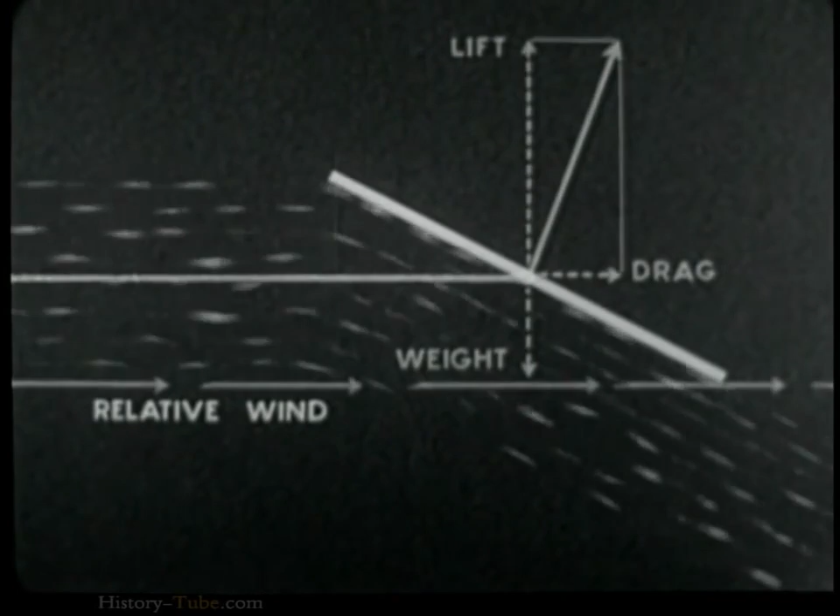The acute angle between the relative wind and the face of the plate is called the angle of attack. This angle may have any value from 0 to 90 degrees and may be either positive or negative.

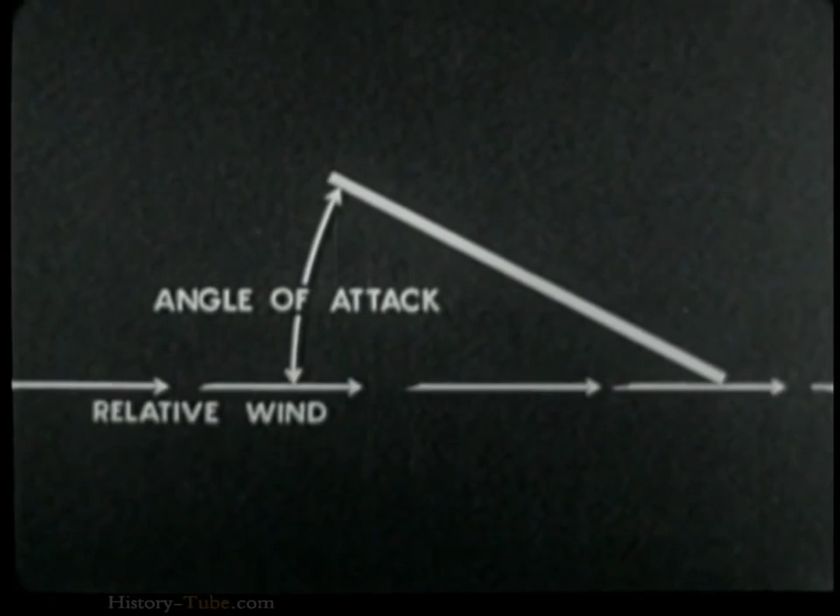An airfoil is any surface designed to be projected through the air in order to produce a useful dynamic reaction. Airfoils which have been studied and used vary widely in form. This is probably the most common type of airfoil section.

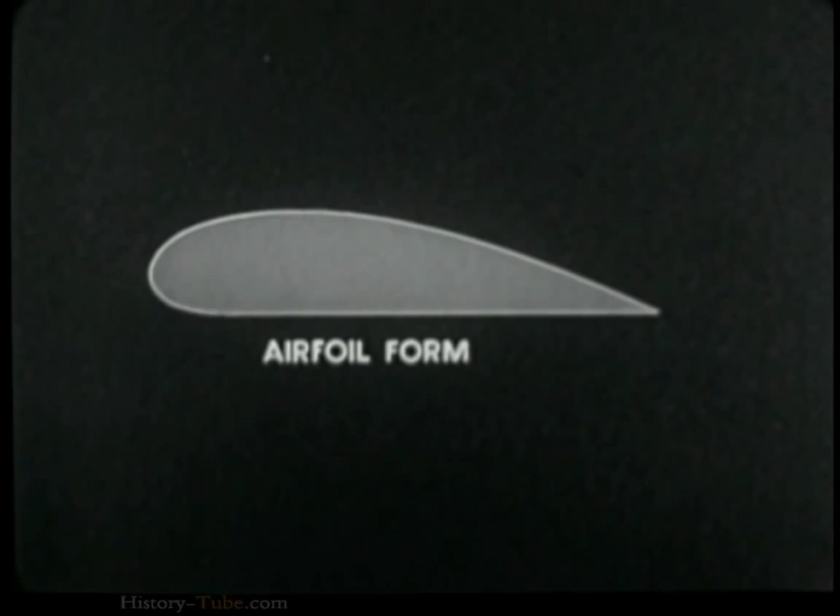Others are convex on their upper surface and concave on the lower, while still others are convex on both surfaces. Relative thickness and curvature of airfoils vary considerably.

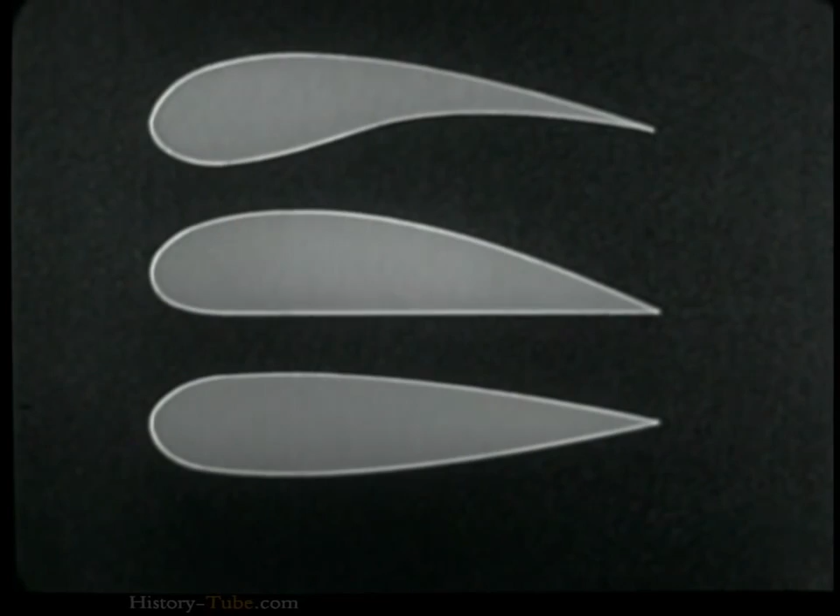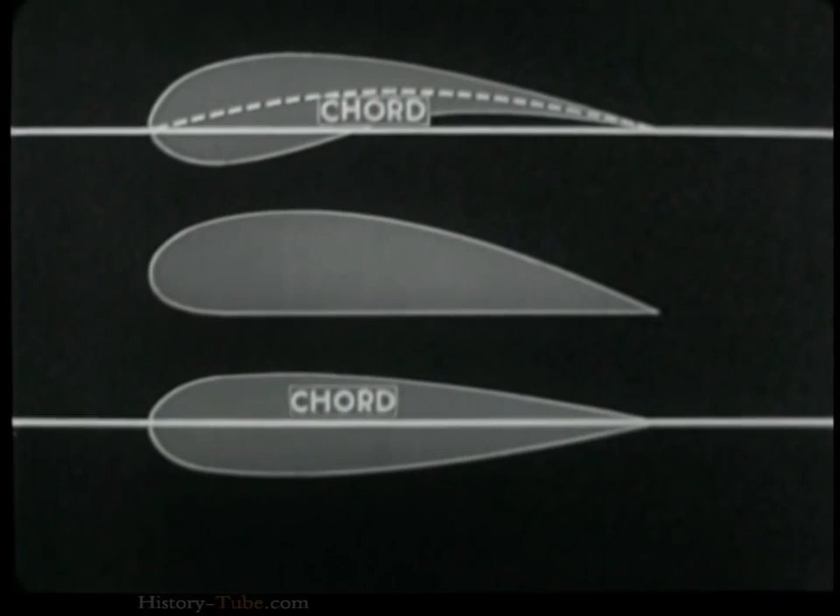In general, a line through an airfoil's leading and trailing edges is known as its chord. This is the case with an airfoil having a symmetrical double convex camber. In an airfoil which is convex on its upper surface and concave below, the chord corresponds to the arc of the mean camber. In other airfoils, it is the line of a straight edge brought into contact with the lower surface at 2 points.

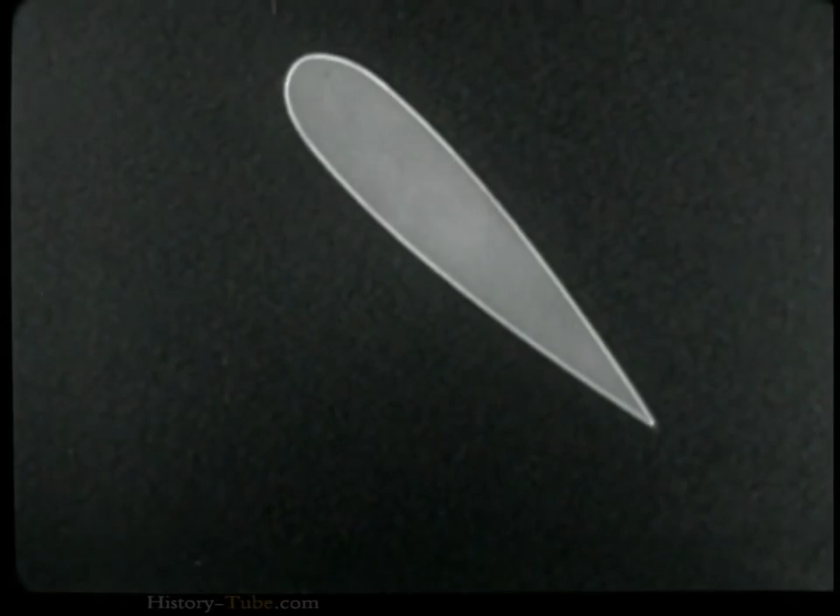The acute angle between the chord of an airfoil and the relative wind is known as the angle of attack of the airfoil.

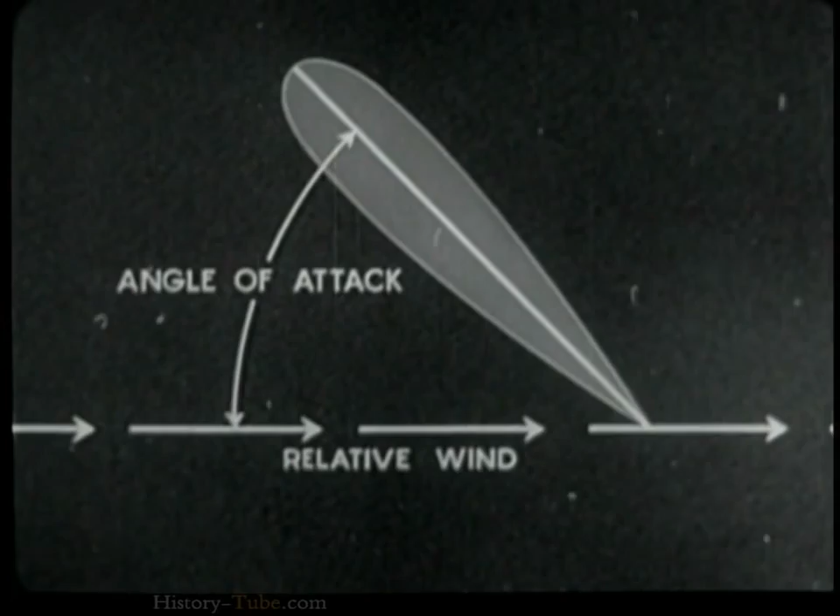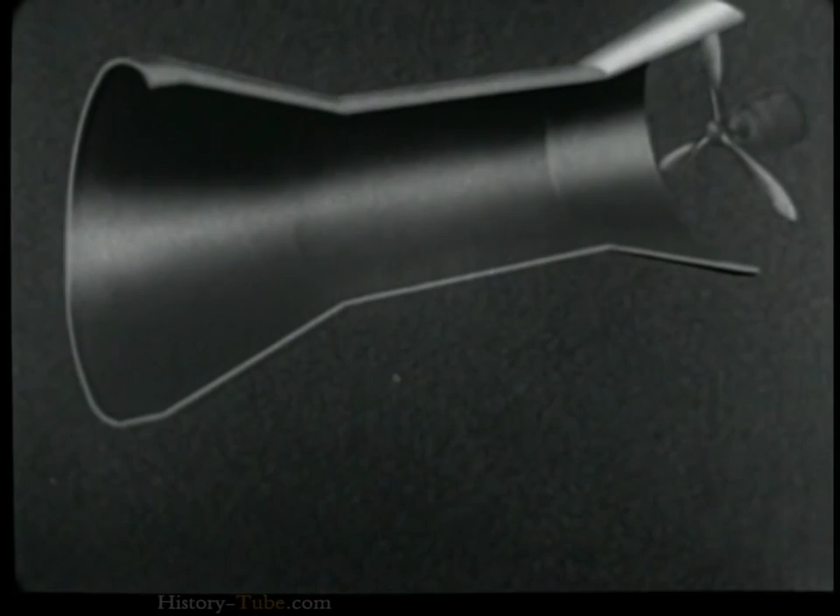A wind tunnel is a device for testing reactions on airfoils and other aerodynamic shapes. It usually consists of a large tube with a constricted throat. A propeller produces airflow, and a honeycomb arrangement is placed at one end to ensure straight airflow.

When lift and drag of an airfoil are to be measured, the model is placed in the chamber and supported by wires. One wire runs from the model through the top of the tunnel to a balance arm which is weighted so as to maintain tension and compensate for other forces.

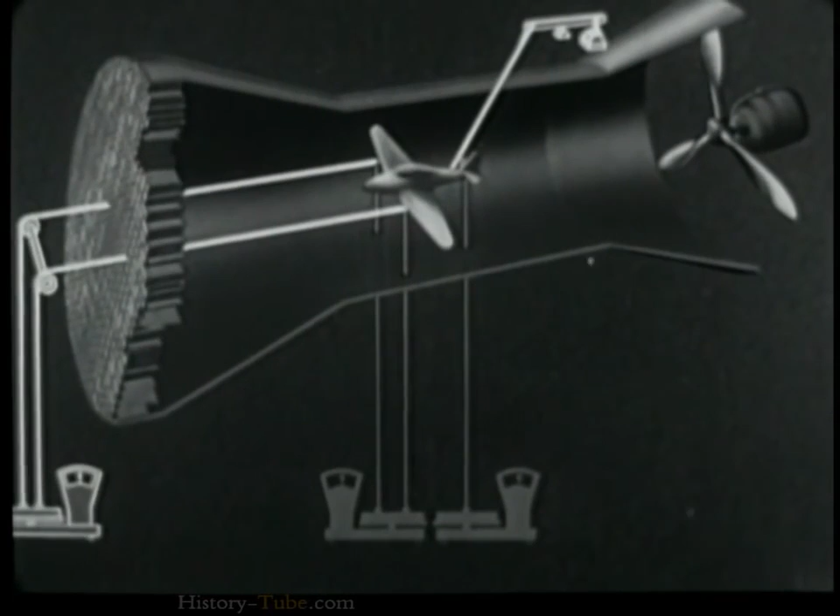From the leading edge of each wing, a wire runs forward in the direction of flight over pulleys, and down to a bar on a platform type of scale. A second pair of wires runs vertically downward from the wings to another scale. Finally, a wire extends from the tail down to a third scale. In this way, the model is suspended so that the various forces exerted upon it may be measured.

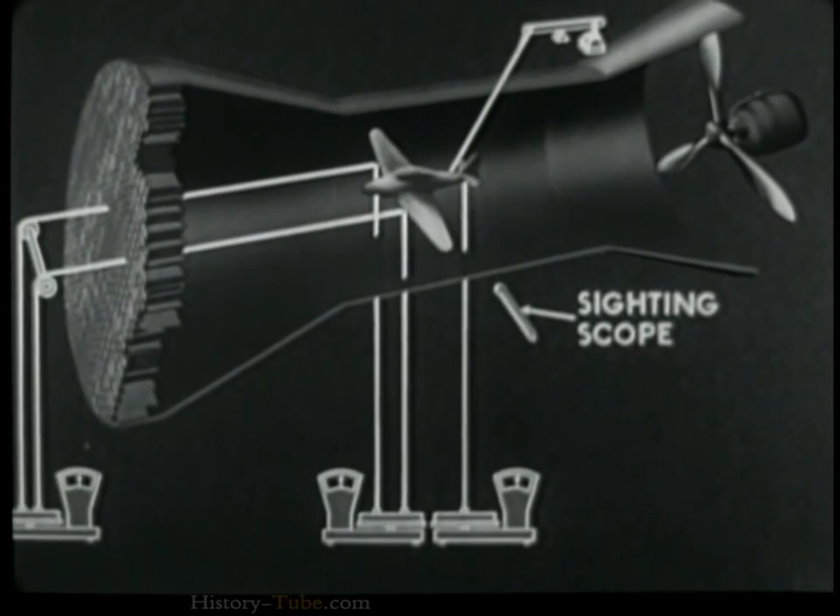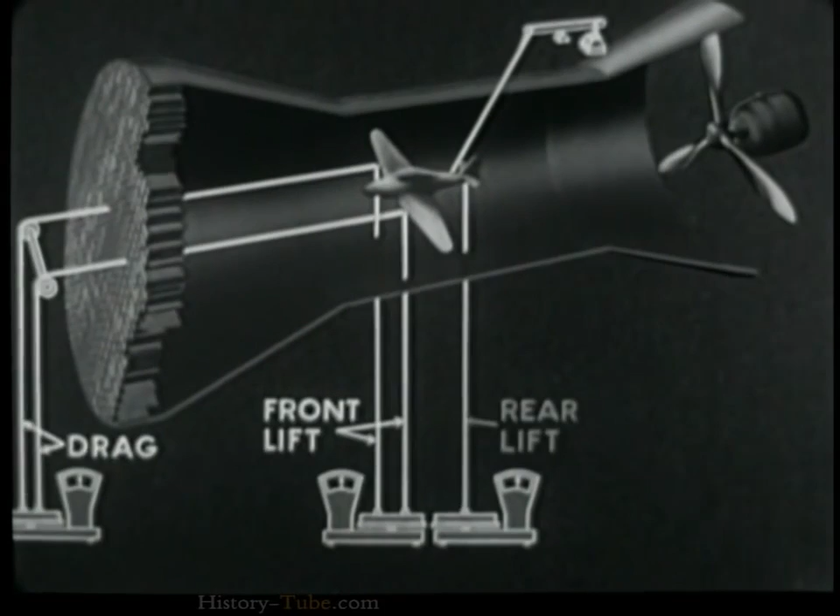The position of the model is observed through sighting scopes. With the air flowing at the desired velocity, drag force is exerted upon these wires. Front lift is measured as the actual lifting force upon these wires. Rear lift as the force upon this wire. Total lift is the sum of front and rear lift.

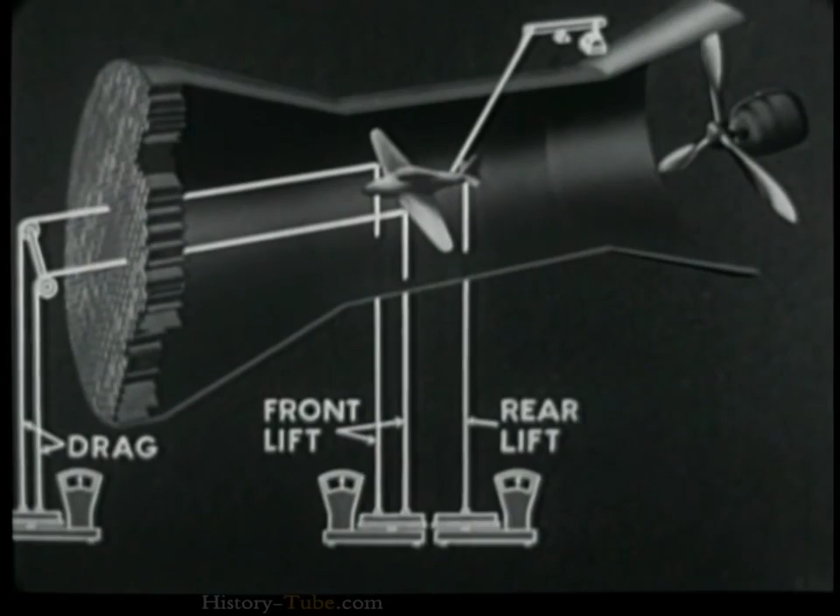Here is one of the Army's wind tunnels at Wright Field. It is nearly 100 feet in overall length, and the test section is 5 feet in diameter. On the intake end, a huge honeycomb arrangement of metal vanes straightens the airflow.

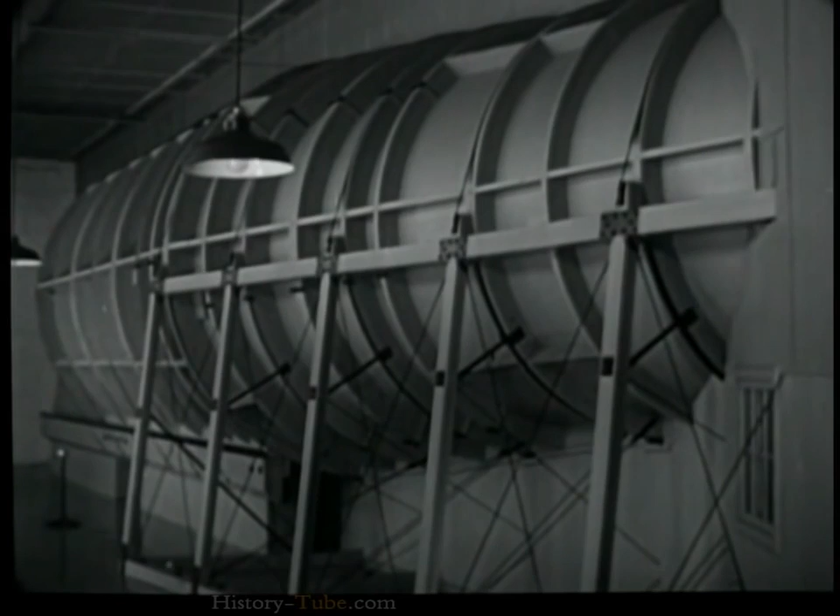Four electric motors of 400 horsepower each furnish power to turn the fan. Two of the motors are shown here. There are two others inside the tunnel.

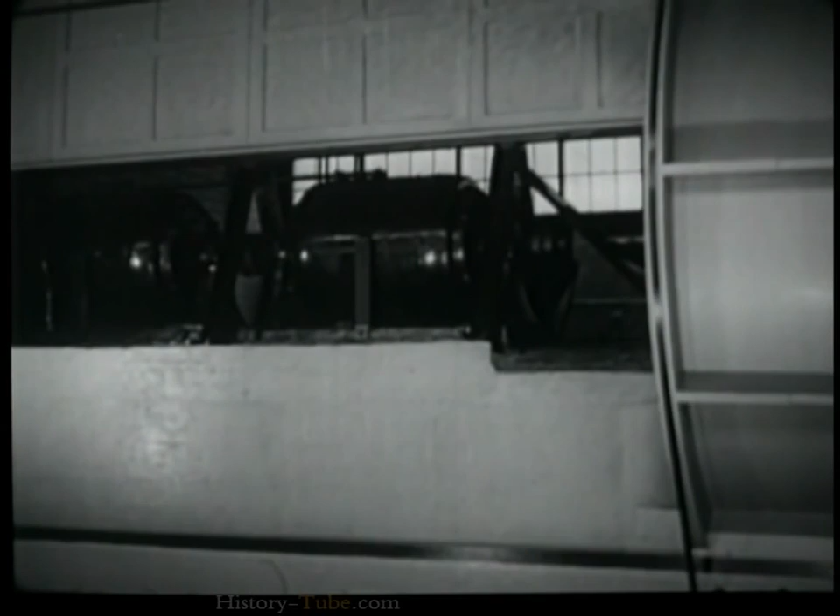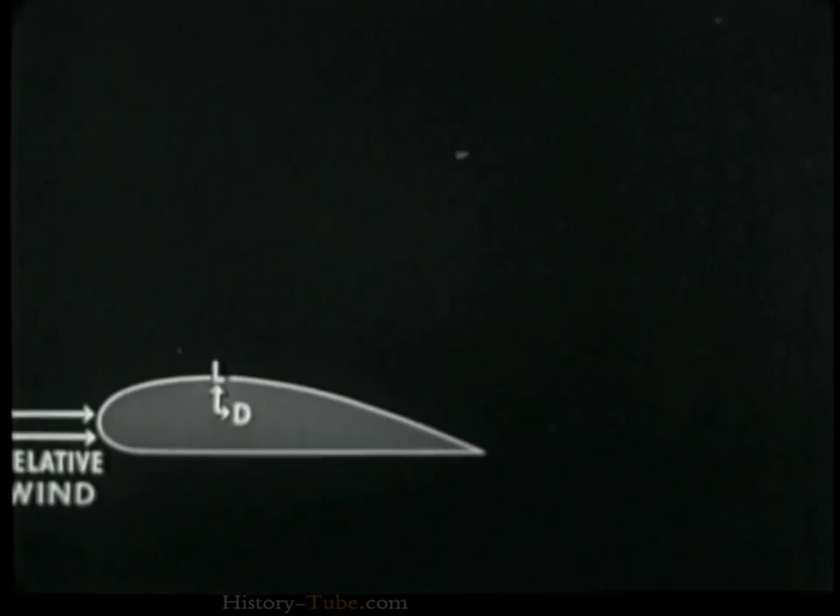The fans are 12 feet in diameter and have 12 blades. When driven at a speed of 700 RPM, they produce an airspeed of approximately 200 miles an hour in the tunnel. Wind tunnel tests show how lift and drag vary with the angle of attack of an airfoil.

In general, as the angle of attack increases, lift and drag increase up to a point where lift decreases abruptly and drag becomes the principal component. This is known as the stalling angle. From this angle to 90 degrees, drag continues to increase while lift falls off.

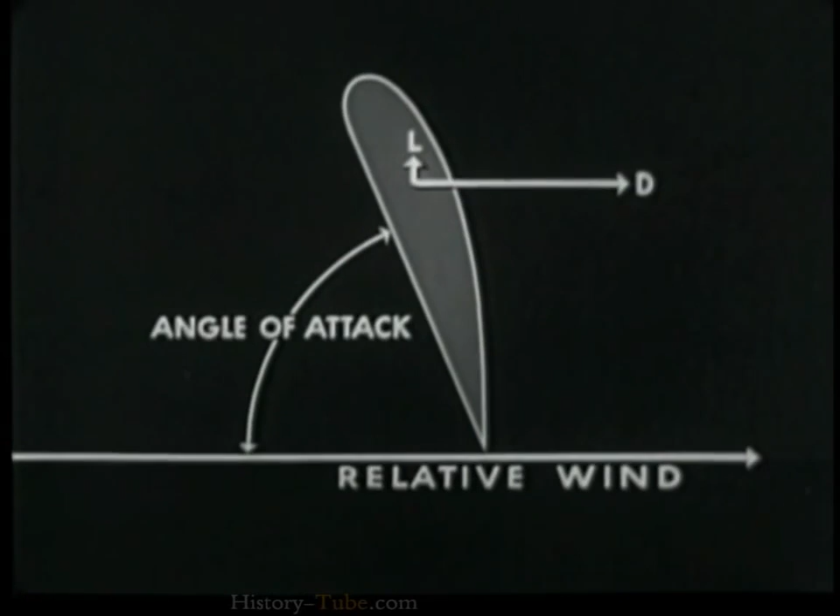At 90 degrees, the airfoil acts like a flat plate. It has maximum drag and negligible lift.

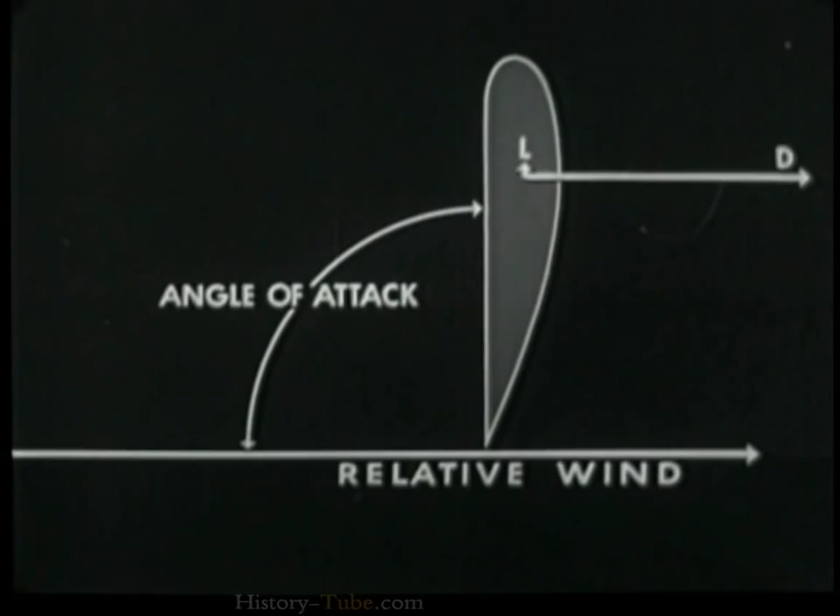Wind tunnel tests have also proven that for any given airfoil, lift and drag vary directly with the area of the wing. If the area is doubled, lift and drag are also doubled.

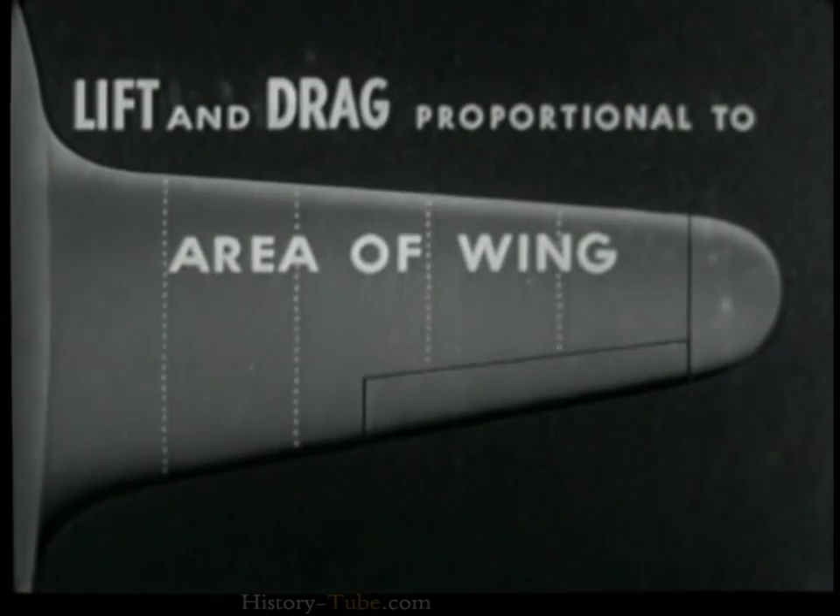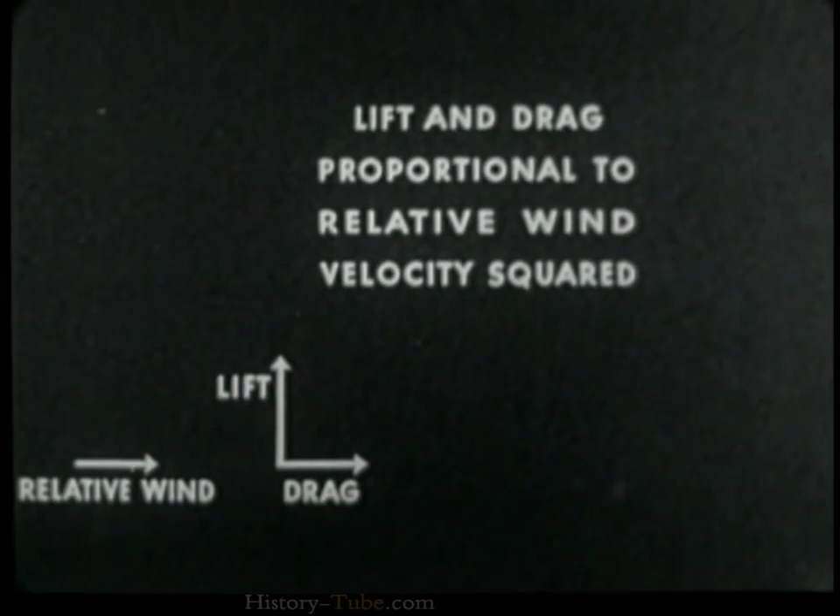Lift and drag vary directly as the square of the velocity of the relative wind. If wind velocity is doubled, lift and drag are multiplied by 4.

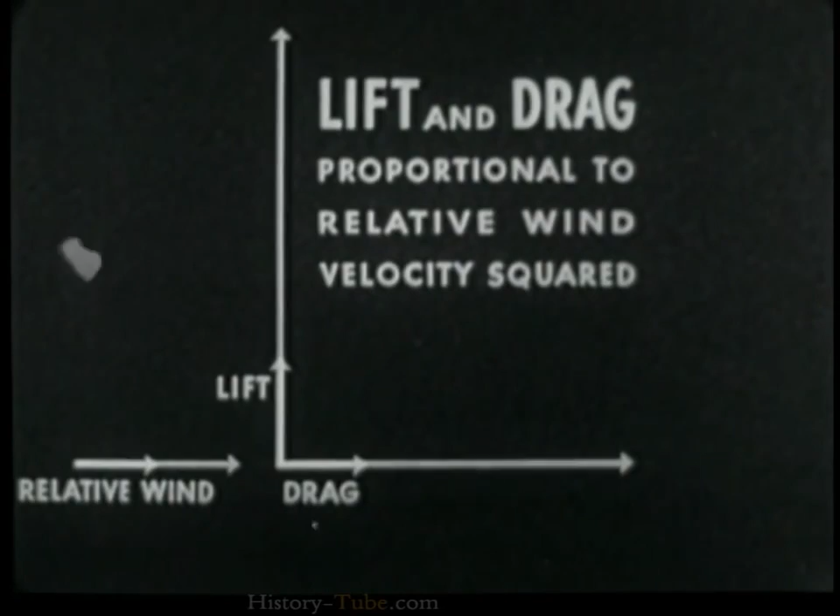Lift and drag are directly proportional to the density of the air passing over the airfoil. If air density is doubled, lift and drag are also doubled in value.

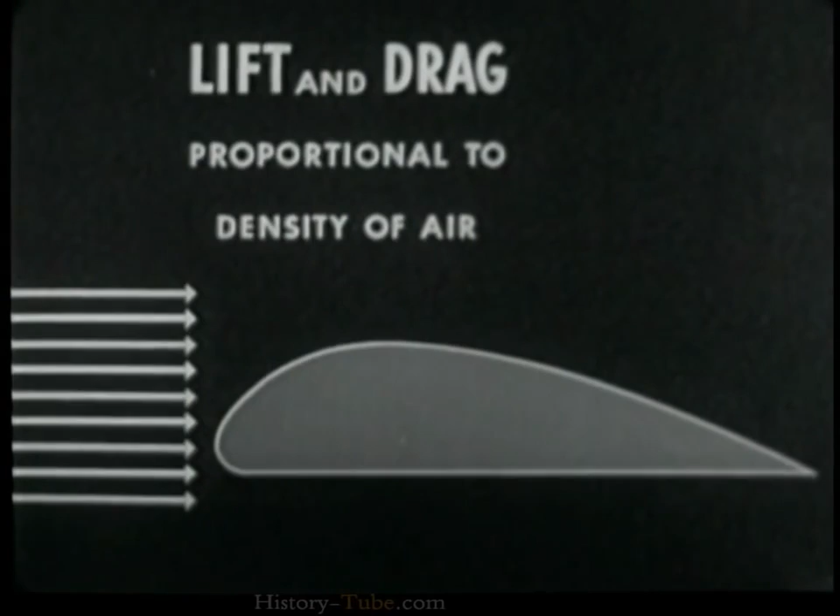Expressed as an equation, the lift is equal to a coefficient which is determined by the angle of attack and shape of the airfoil, multiplied by the density of the air, multiplied by the area of the wing, multiplied by the velocity of the wind squared.

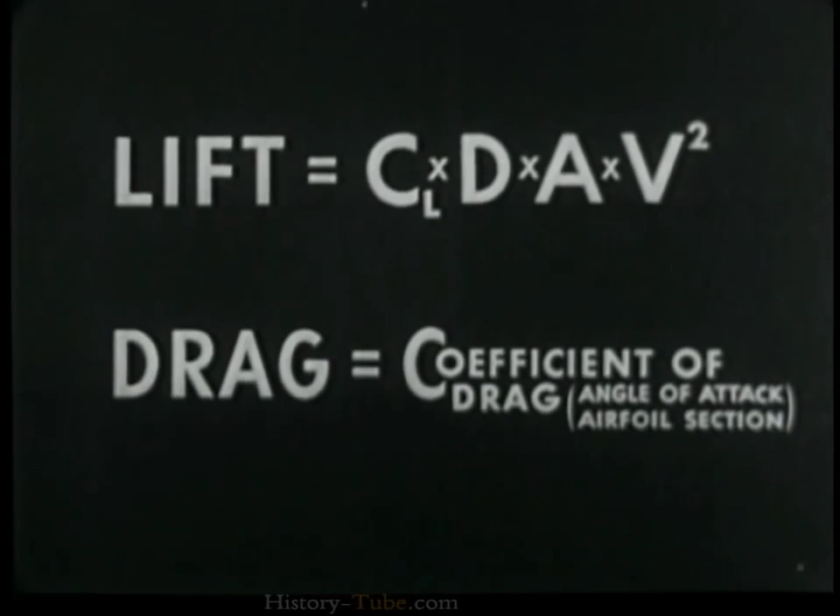Drag equals the coefficient which is determined by the angle of attack and shape of the airfoil, multiplied by the density of the air, multiplied by the area of the wing, multiplied by the velocity of the wind squared.

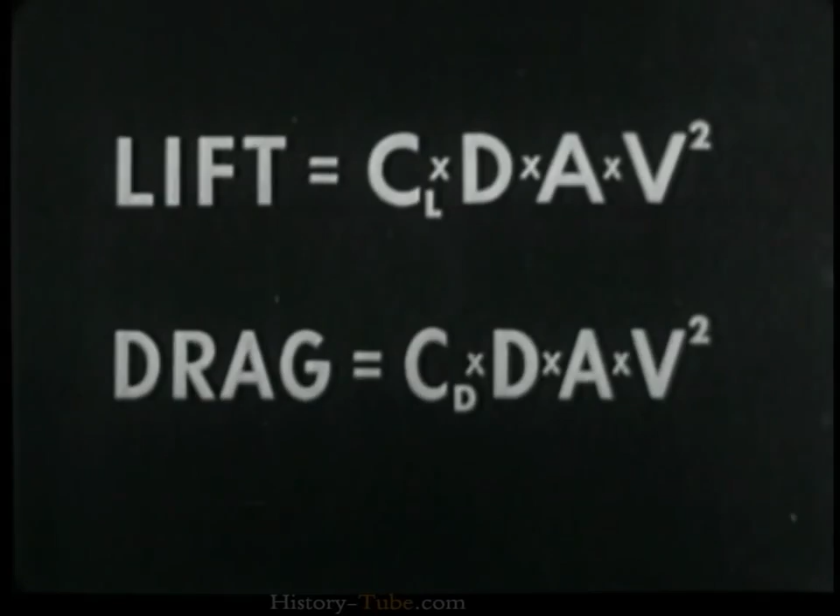When an airplane is flying horizontally at a constant velocity, the forces acting upon it are in equilibrium. The retarding force, or drag, equals the propelling force, or thrust. The lift must equal the total weight of the airplane.

Therefore, the lift and drag equations serve to determine how much weight an airfoil will lift under certain conditions and how much thrust horsepower is required to overcome the total drag of the airplane.

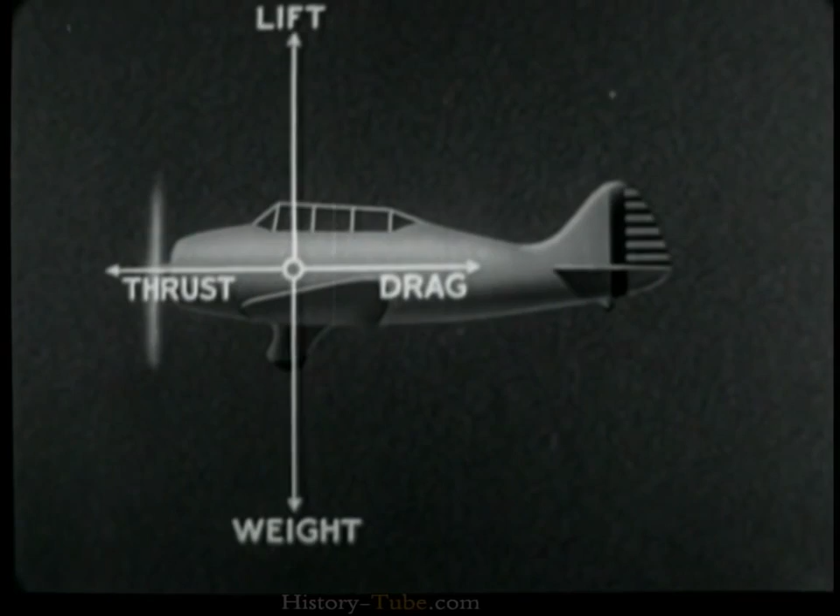The air pressure at various points on an airfoil is measured in order to determine the airfoil's efficiency, or its suitability for a given purpose.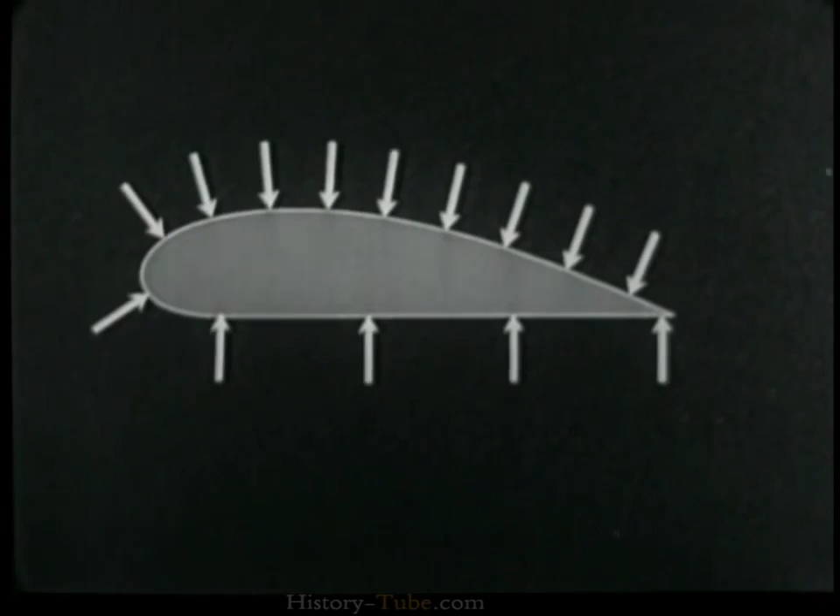The measurements are made by building into a model airfoil small copper tubes which are sealed flush with the surface of the model.

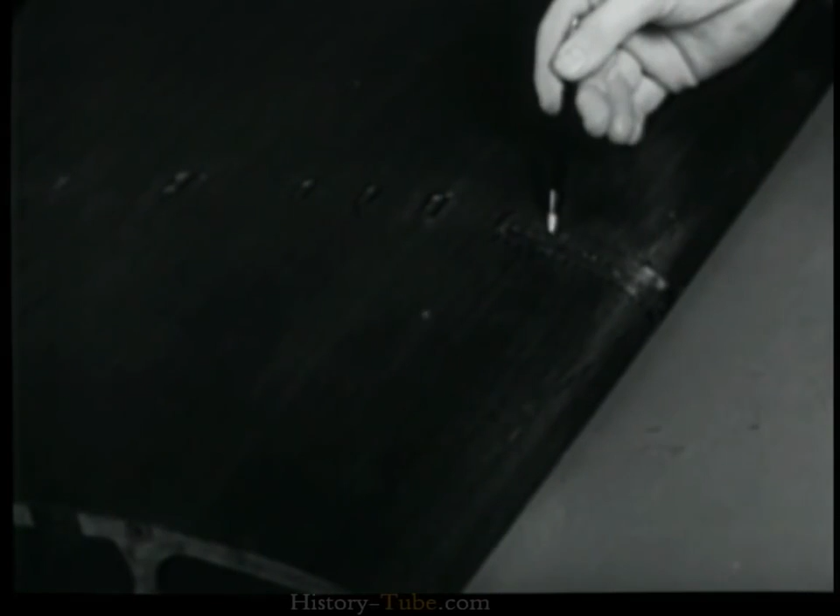These tubes extend from the model to a pressure measuring device outside the tunnel. The device is called a manometer. This figure illustrates its principle of operation.

The liquid in both the tube and the reservoir will be at the same level as long as the pressure in both tube and reservoir are equal.

If by any means, such as this plunger for example, the pressure in the tube is increased, the liquid is forced into the reservoir, lowering the level in the tube.

If pressure in the tube is decreased, the liquid rises above the level of the reservoir.

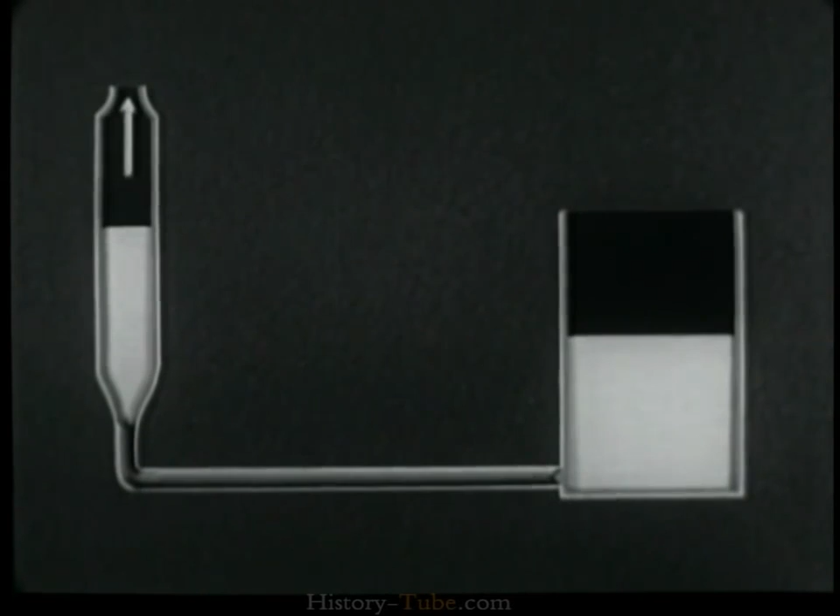In a device such as this, if the liquid in the tube is subjected to varying pressures, the level will rise above or fall below the level of the liquid in the reservoir as the pressure is decreased or increased. Reading of liquid levels provides an accurate means of determining pressure differences.

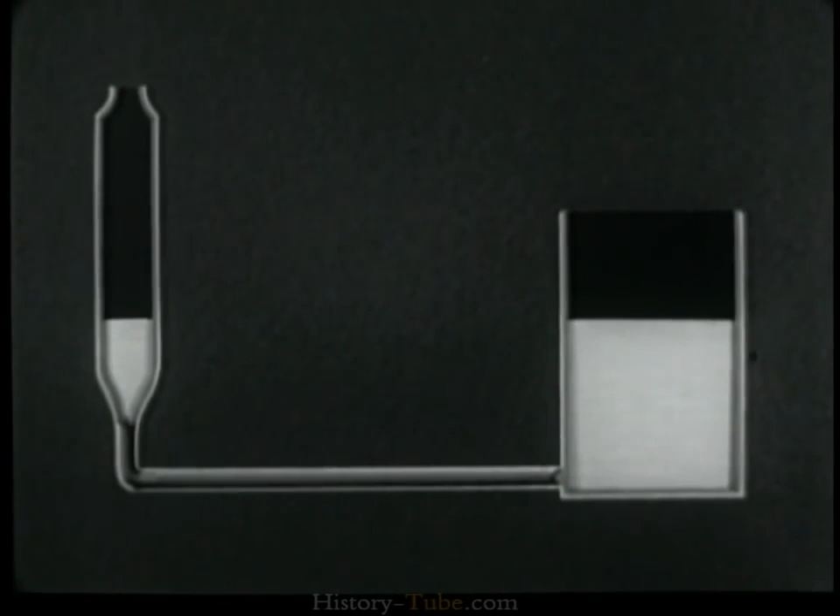Additional tubes may be added, each connected to a different value of pressure, and each will indicate that pressure accurately, regardless of pressures in the other tube.

Operating on these principles, this bank of manometer tubes is used to determine pressures on an airfoil. Because all tubes are at the same pressure, being exposed to the atmosphere, the levels in the tubes are equal.

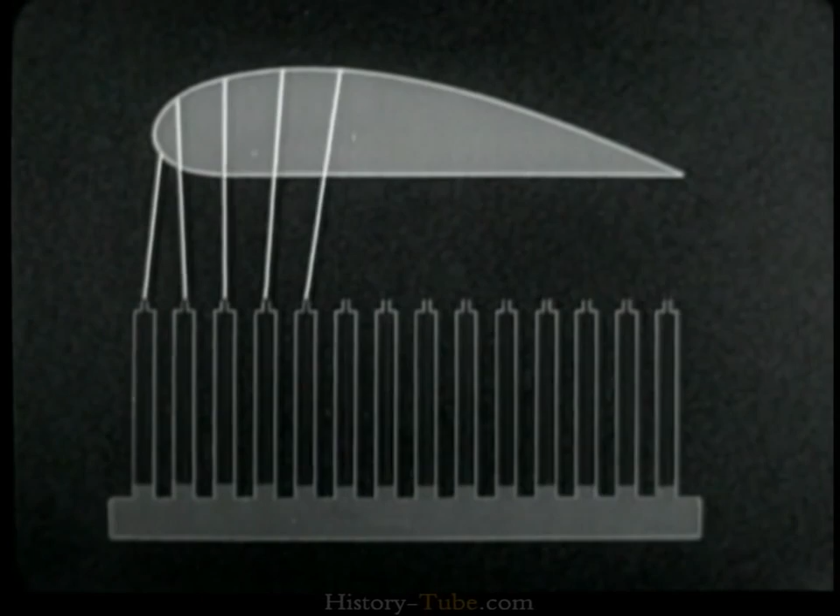For test purposes, each manometer tube is connected to a different point on the surface of the airfoil. The majority of these test points are located on the leading edge and upper surface. Relatively few are placed on the lower surface.

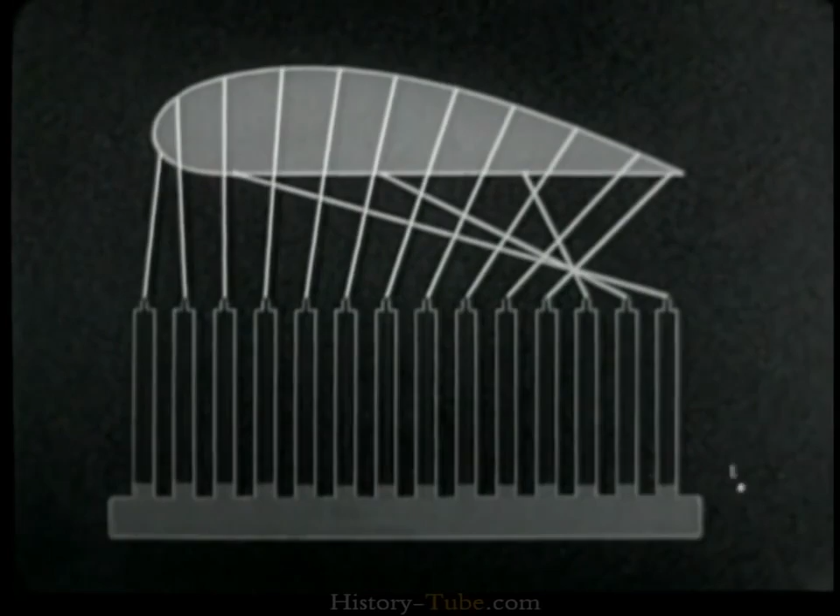Of course, this is only a schematic representation of the connection. In actual practice, tubes run from the manometers through an opening and inside of the airfoil to the test points.

Atmospheric pressure is usually taken as the reference level. Pressures above atmospheric are called positive. Those below atmospheric are called negative.

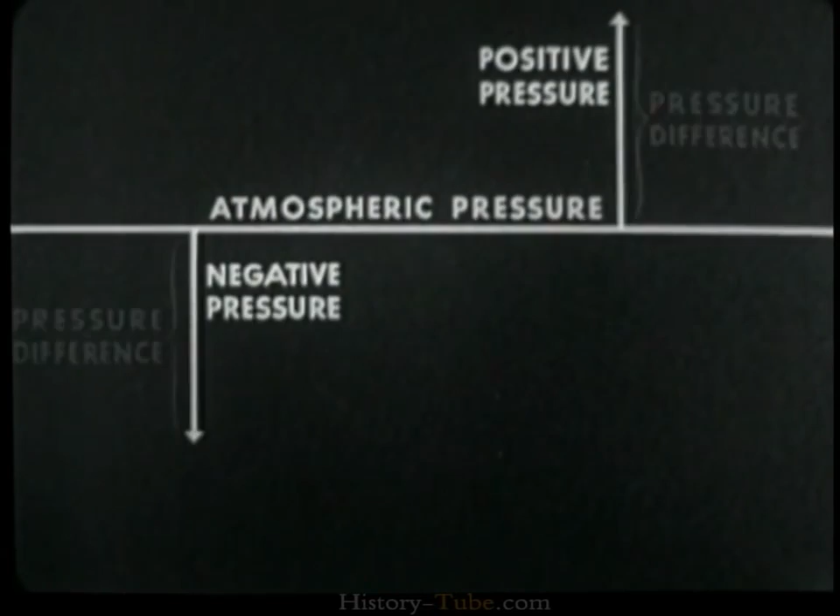Actually, these values are pressure differences with reference to the atmospheric pressure. With reference to absolute zero, all pressures are necessarily positive.

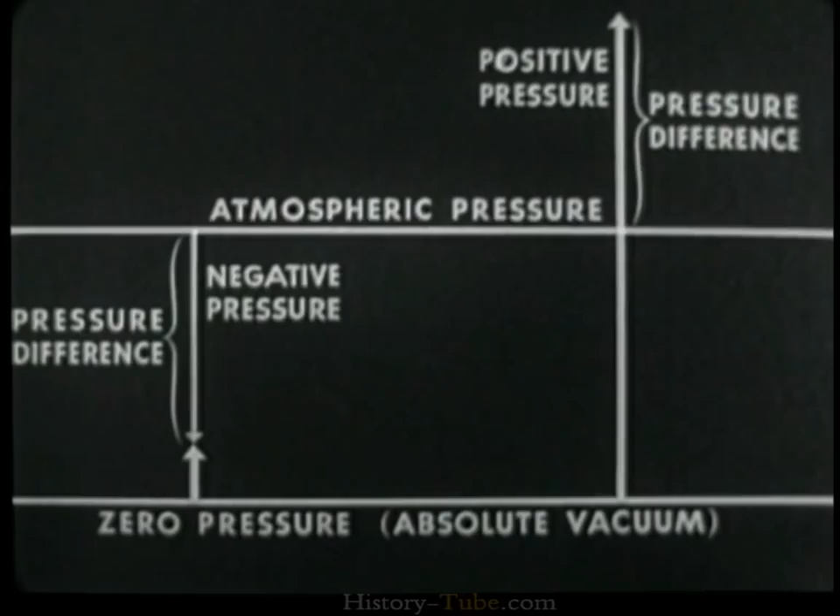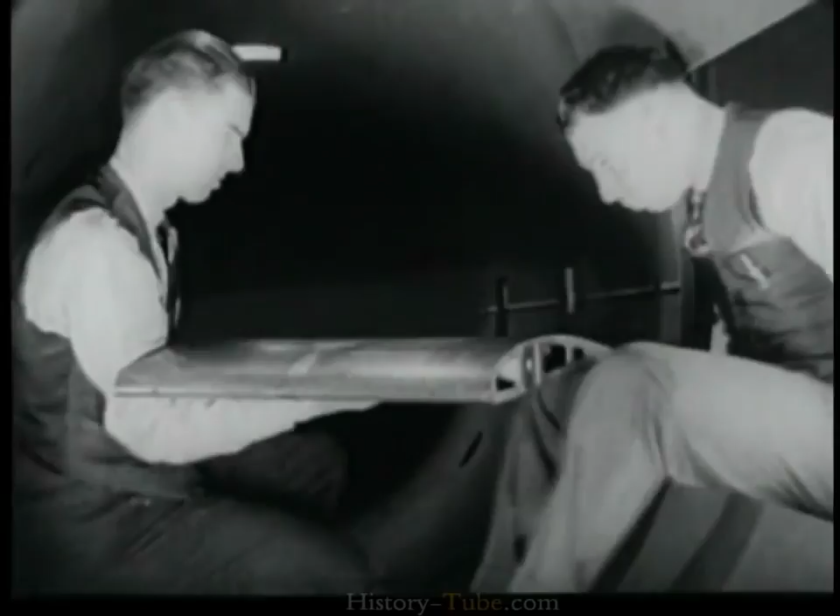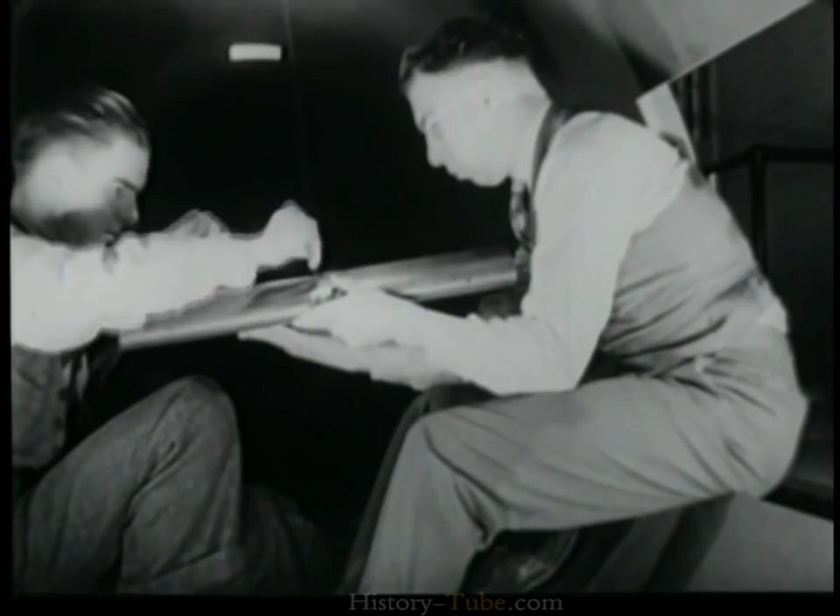The model airfoil is placed in the test section of the wind tunnel. It is supported by wires which will transmit its lift and drag forces to the scales.

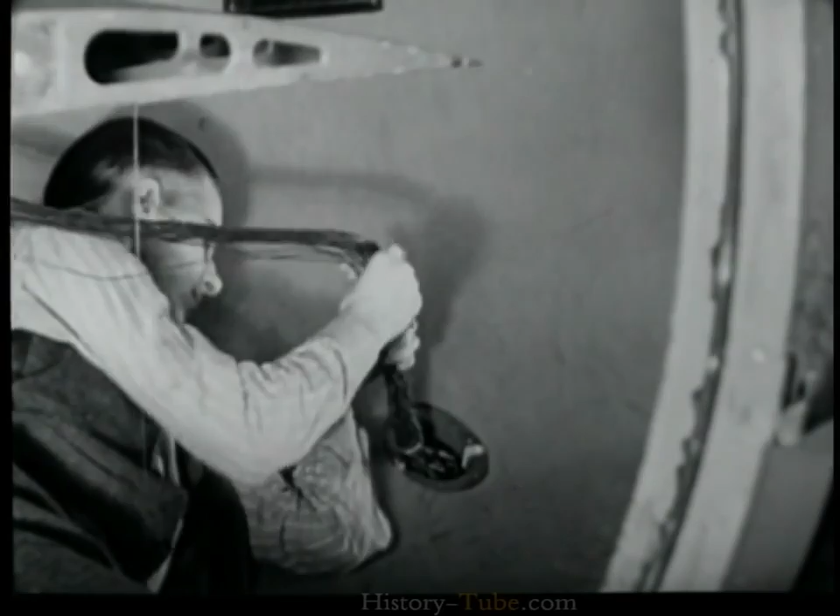Tubes which connect to the test points are passed through an opening in the tunnel wall and connected to the manometer bank. The manometers, being at equal pressures, are at the same level and are connected to the airfoil. Thus, from each manometer tube, there is a direct connection to a definite point on the surface of the model airfoil.

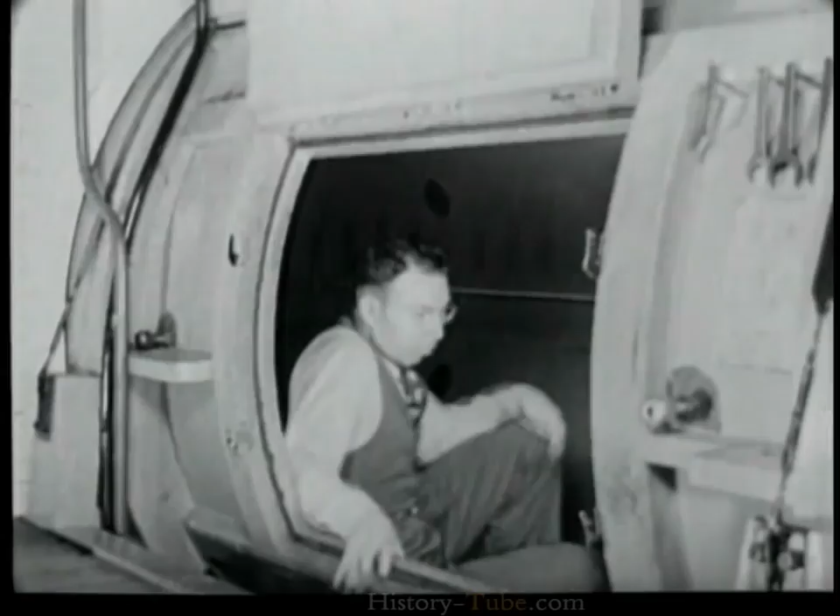All is now ready for the test, and the engineers leave the tunnel to take up positions where they can observe and measure reactions upon the airfoil. The motors which drive the fans are started.

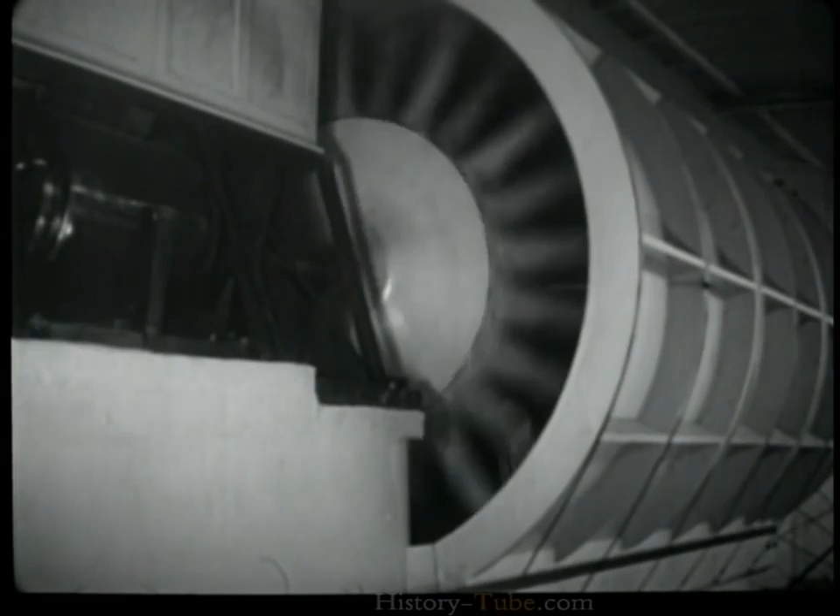In the tunnel, the model airfoil is subjected to the same conditions which it would encounter in actual flight through a medium of the same density, and pressures along the surfaces are at such values as would be met under flying conditions. The manometer tubes tell the story.

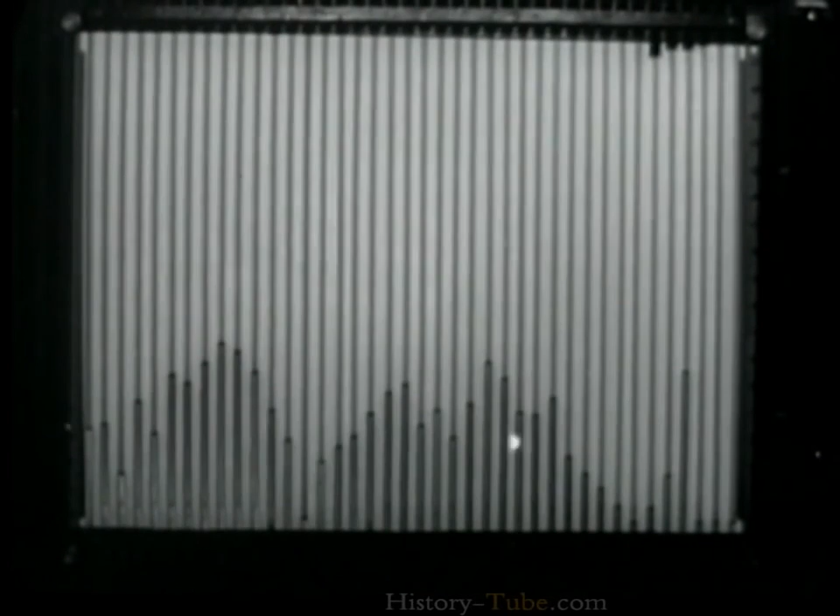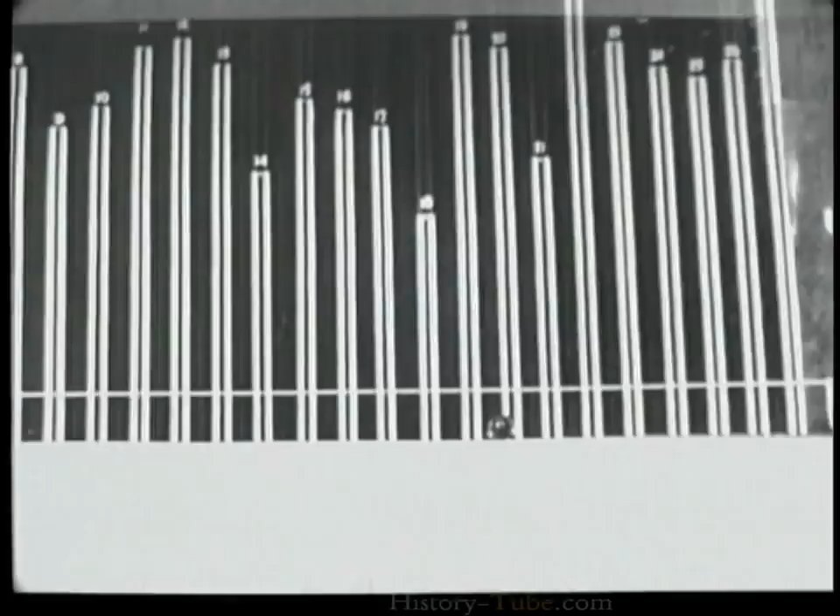Levels fluctuate slightly as minute variations in airspeed or density occur, but the ratios are constant, and the position of the liquid in the tubes shows both positive and negative values for the airfoil. The tubes are photographed to assure simultaneous readings of all tubes, and the photograph is used by engineers to plot the pressure curve.

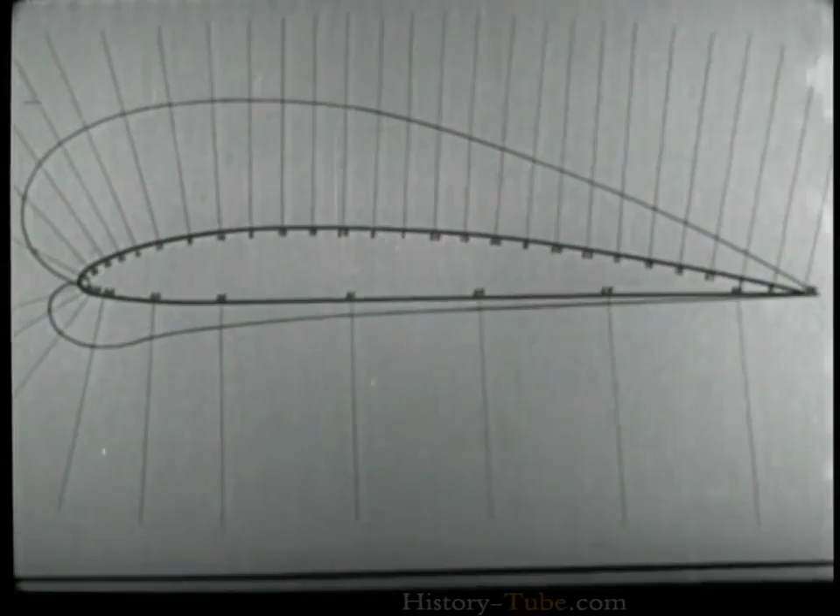In this manner, a diagram is constructed showing the nature and distribution of pressures over both surfaces of the wing section at varying angles of attack. Positive pressures are shown in black, negative in gray.

At 0 degrees, there is a small bulb of positive pressure directly upon the leading edge of the wing. Another area of positive pressure encloses the trailing edge and extends forward about 1/4 chord length along the lower surface. Elsewhere, the pressures are negative.

As the angle of attack is increased, the positive pressure bulb moves lower down on the leading edge and back along the lower surface of the wing, enclosing the trailing edge. The negative pressure distribution remains fundamentally unchanged, although its values are greatly increased. This diagram indicates that the wing has begun to exert a considerable lift.

Increasing the angle of attack still further alters pressure distribution very little, although there is a marked change in values, particularly along the upper surface, where negative pressures are now exerting a powerful lift force.

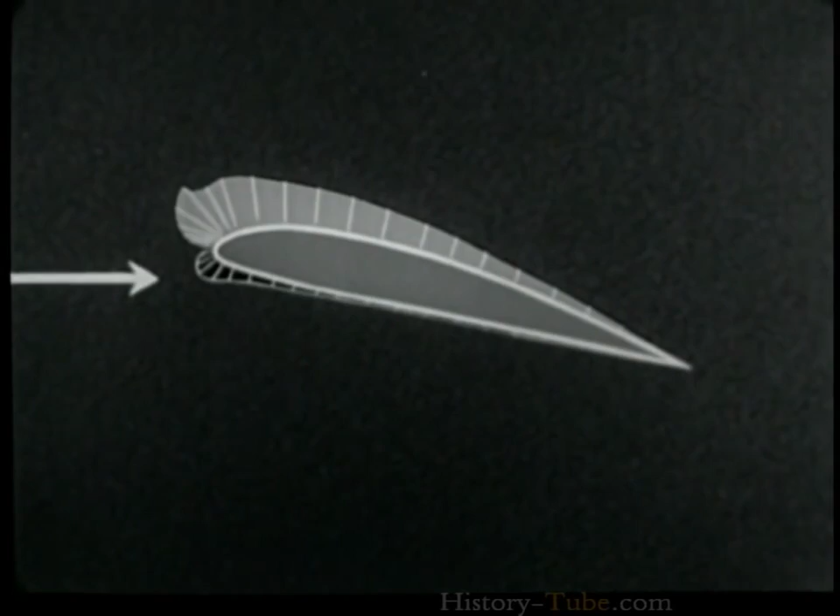By further increasing the angle of attack, positive pressures remain practically unchanged in both value and distribution, but the value of negative pressure continues to increase.

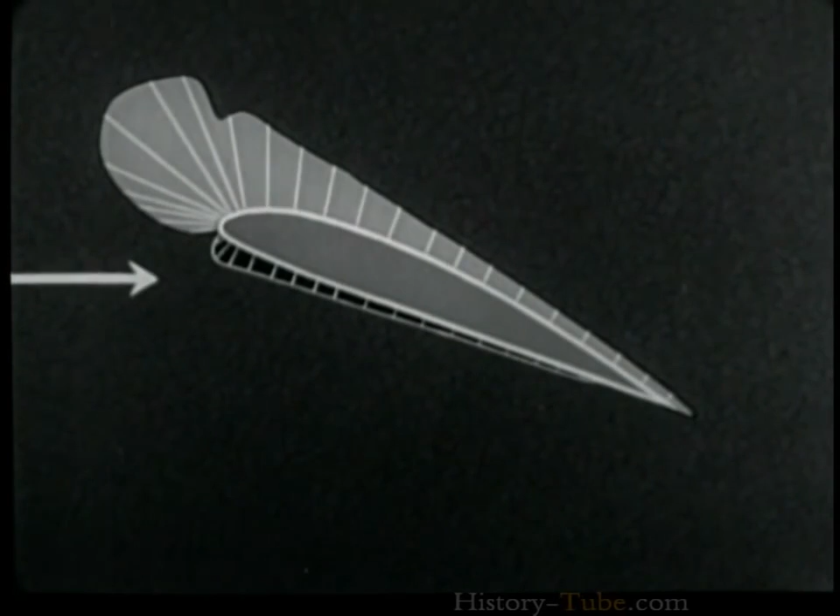At this angle of attack, the wing is well past its stalling angle, yet the positive pressures show little indication of change. With the negative pressures, the greatest change is noticed at the leading edge of the wing, where the area continues to expand, and the outline of the pressure area is extremely irregular.

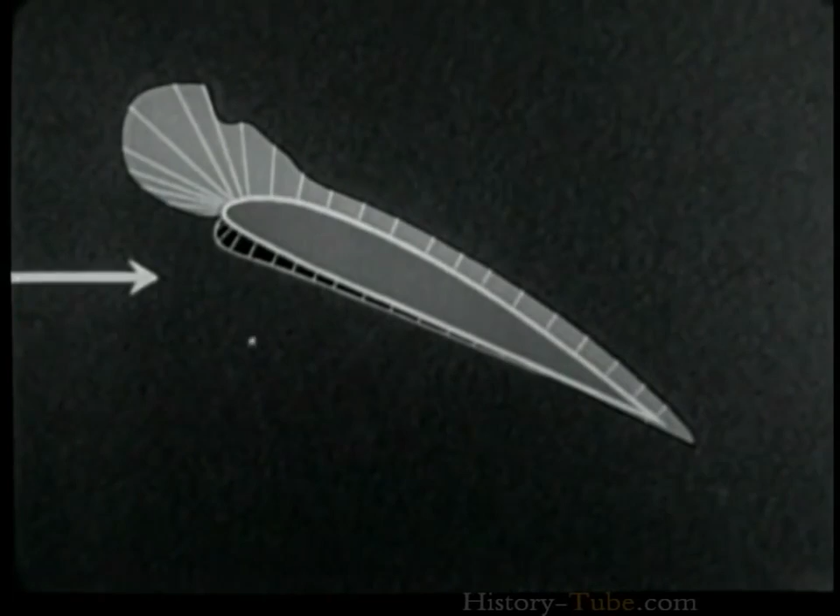Increased angle of attack brings no important change in positive pressure value or distribution, but the negative pressure area is tending to equalize in value over the entire upper surface of the wing.

At this angle of attack, the forward protuberance disappears completely, and an area of nearly equal negative pressure blankets the entire upper surface of the wing. Positive pressure areas still show no important change.

Another increase in the angle of attack merely results in increased values, distribution remaining almost the same as before.

At this final angle, pressures have reached still greater values without any appreciable change in distribution. It might appear from this diagram that at this angle of attack, the uniform pressure distribution over the upper wing surface would be desirable.

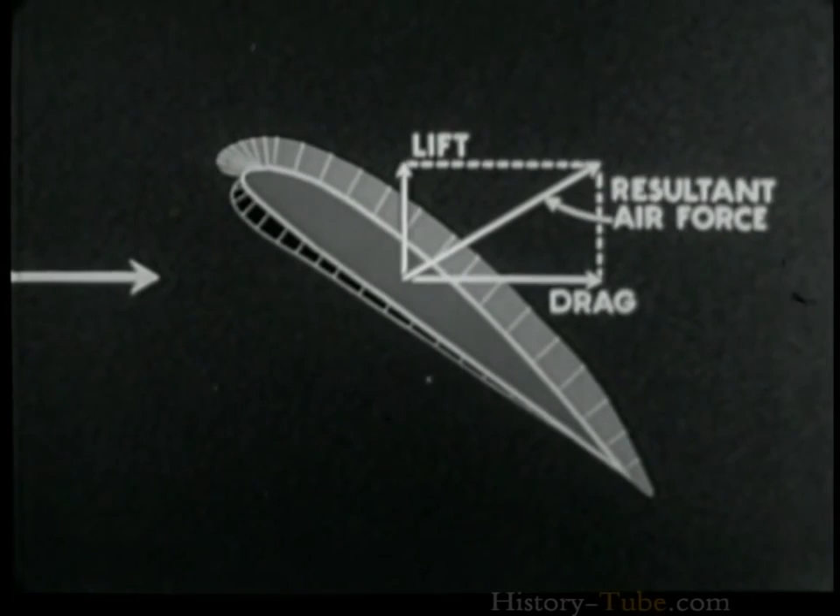However, above the stalling angle, the resultant air force acts in such a direction that the drag is its large component.

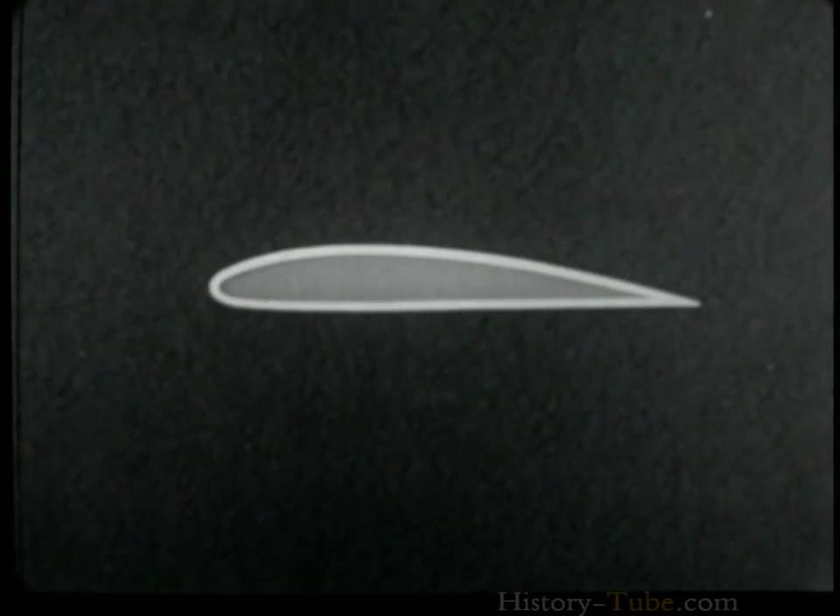An airfoil at rest in still air is at atmospheric pressure over its entire surface. It has been shown that airfoils derive their lift from the pressure differences acting upon their surfaces, the negative pressure difference upon the upper surface at normal angles of attack being the major component of the lift force.

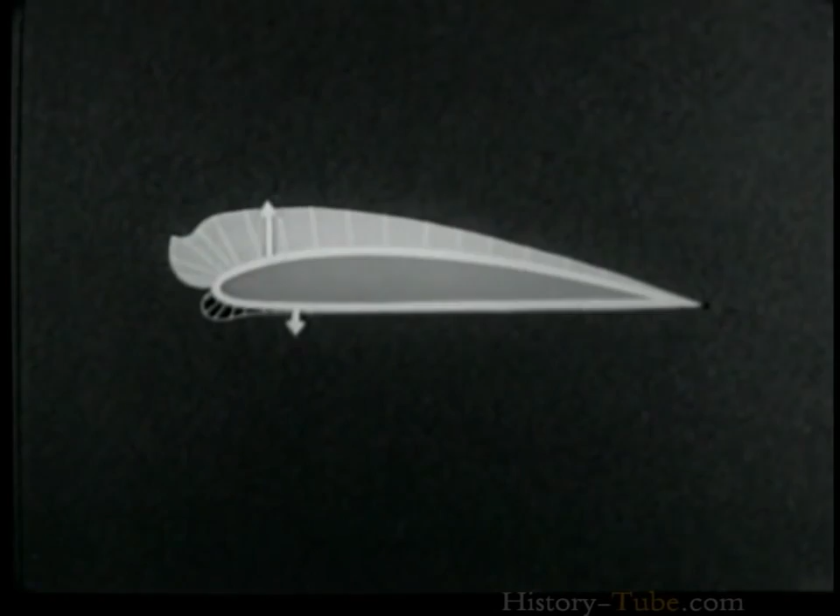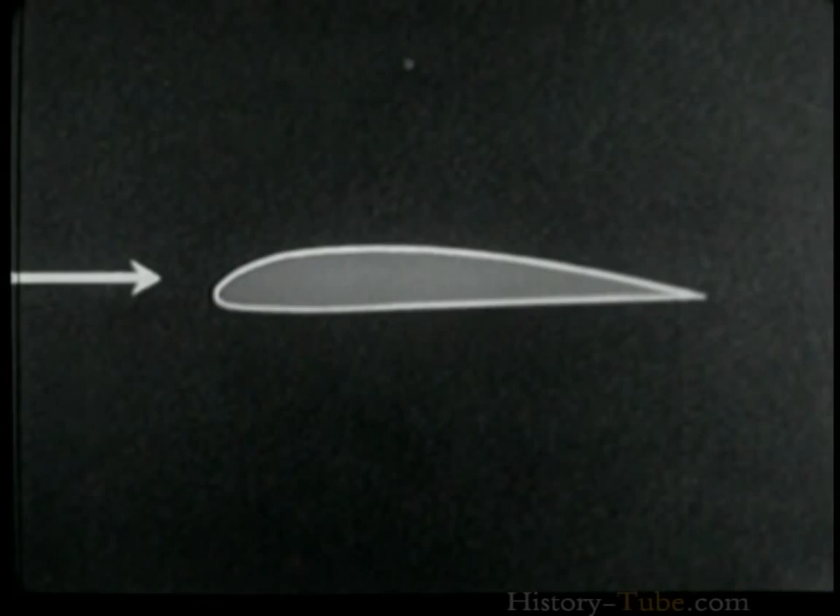Now let us see what happens to pressure values and distribution at negative angles of attack. From 0 degrees, the angle is decreased to a slight negative value.

The positive pressure bulb on the leading edge is practically unchanged. The negative pressure on the upper surface of the wing shows little change. However, the negative pressures along the lower surface begin to increase at the leading edge.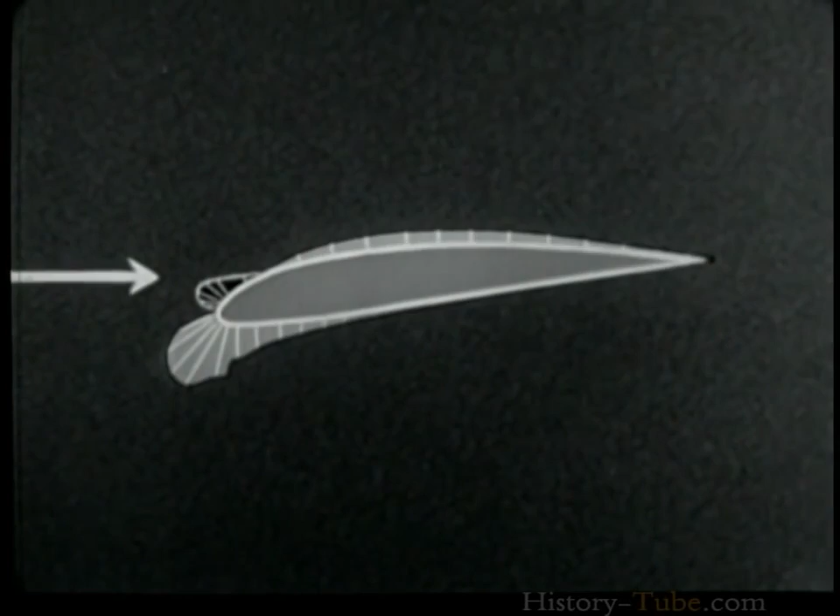Further increases in this area, accompanied by very slight changes in the positive pressure bulb, are the only differences which are readily observable as the angle of attack is further increased.

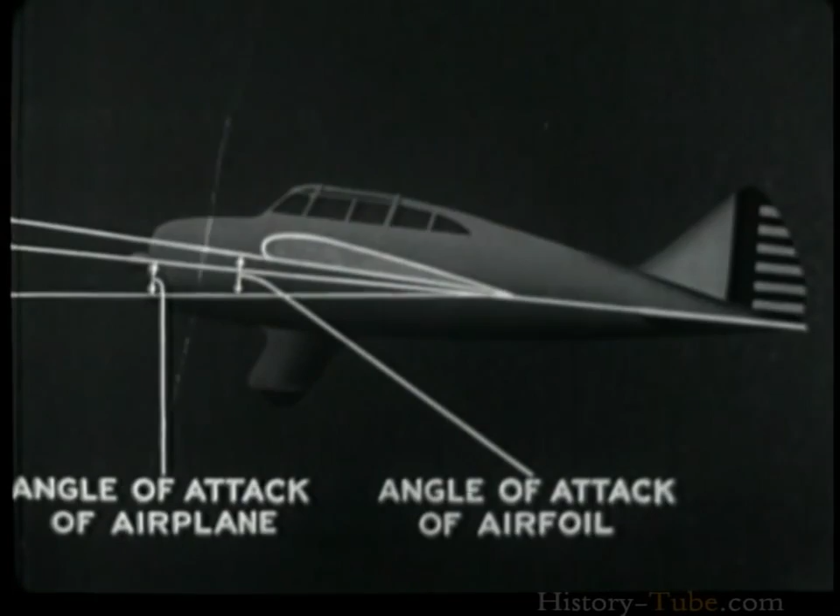The angle of attack of an airfoil was shown to be the acute angle between the chord of the airfoil and the relative wind. The angle of attack of the airplane as a whole is the acute angle between the longitudinal axis of the airplane and the relative wind. The difference between these two angles is constant for any given airplane and is called the angle of incidence.

Although the angle of attack is constant for any given wind tunnel test, in actual flight the angle of attack of the airfoil varies with changing attitude and speed of the airplane. Consider the case of an airplane flying horizontally at a small positive angle of attack.

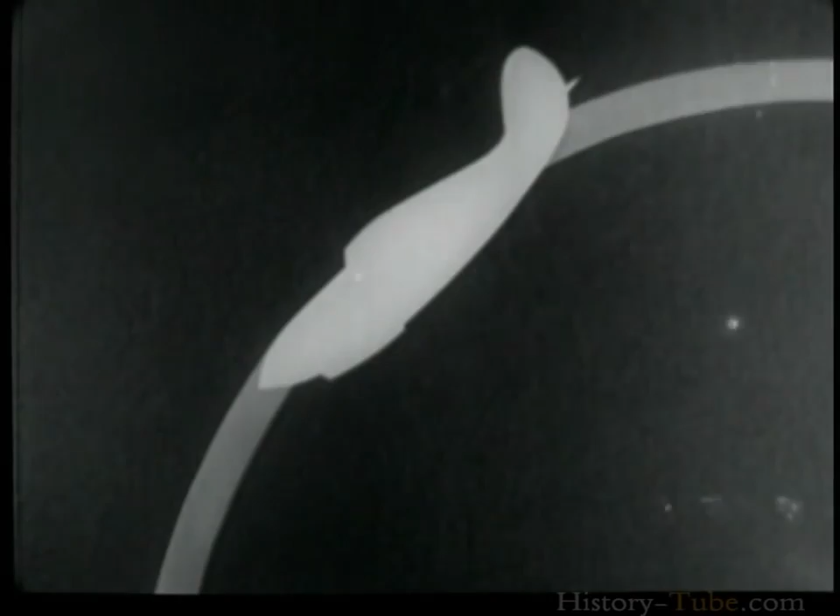As the controls are set to put the airplane into a dive, the angle of attack decreases and the speed increases. Lift decreases, since in this attitude the weight of the airplane is opposed by the resultant of lift and drag. As the flight approaches the vertical, speed increases until the terminal velocity is reached in the so-called vertical dive.

In this condition, lift is 0, and the weight of the airplane plus its thrust is opposed by drag alone.

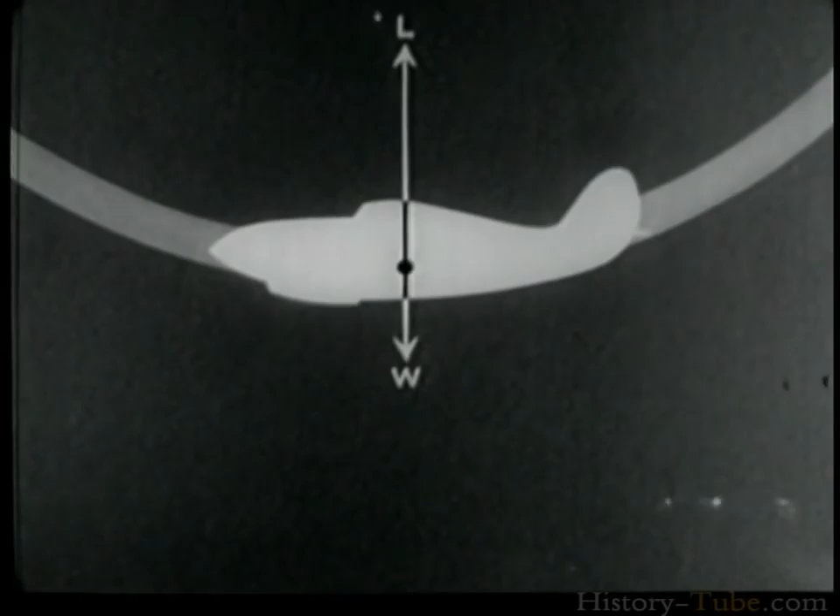In pulling out of the dive, the angle of attack must be increased slowly. During this maneuver, the lift may attain several times the value of the weight. This increase in lift produces acceleration, which in turn